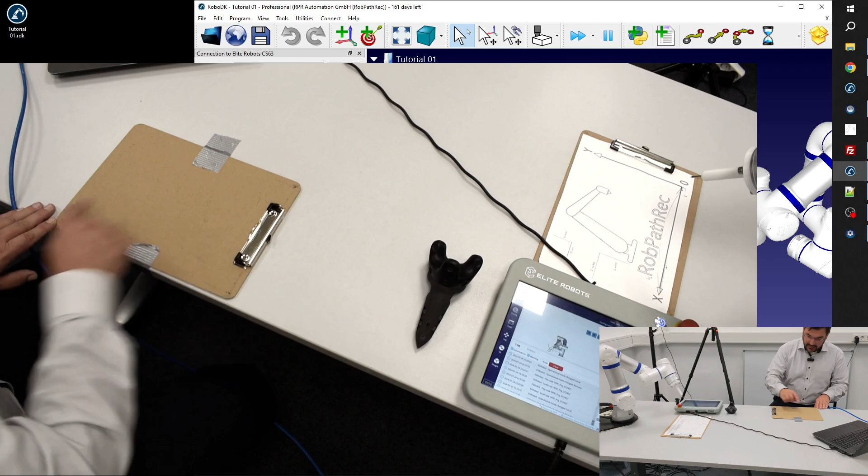So as you can see, I just modified my setup a little bit. I just fixed the same wood plate here in front of me as what we are using here as a frame over there. The crucial point is that I have origin, X and Y, exactly one by one, in the same manner, the same distances, the same position, and the same sequence: origin, X and Y. You can see that this wooden plate is somehow rotated 90 degrees compared to the other one. It's not a problem.

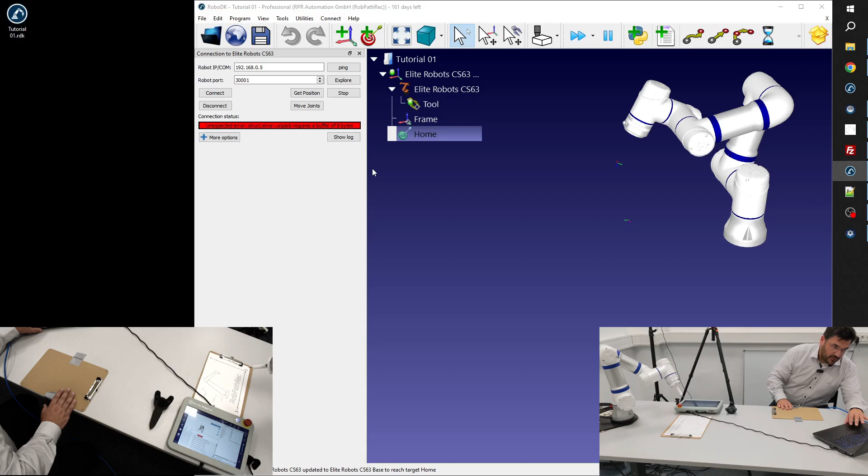We have everything running, and I will start the RobPathRec app, and I will show you that you can make the recording right now, right here, so you can move anywhere. You can go out to a completely different room or a different site, and then you can transfer the program remotely to the robot. And as long as you are doing the programming, the robot still can do some productive work for you. This is the most important, I think.

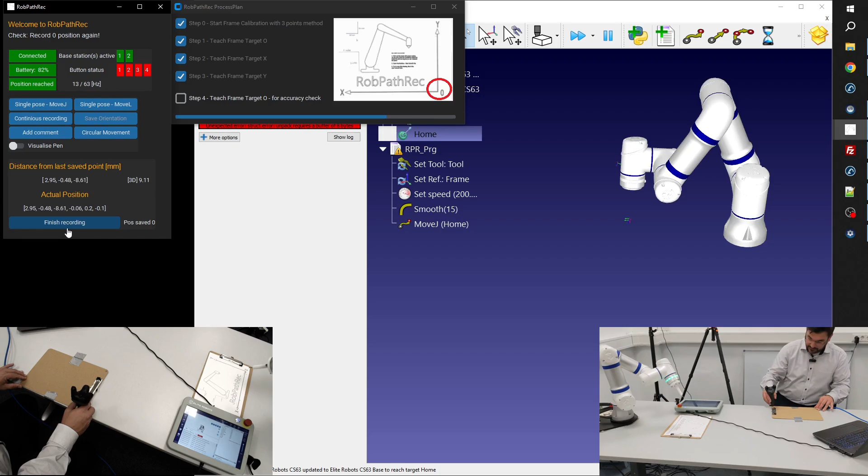So we are just starting with the initial calibration, which will not be very accurate, I guess, because I didn't really take care about the base stations. I just rotated one base station. You can see 1.6 millimeters. This is fair enough.

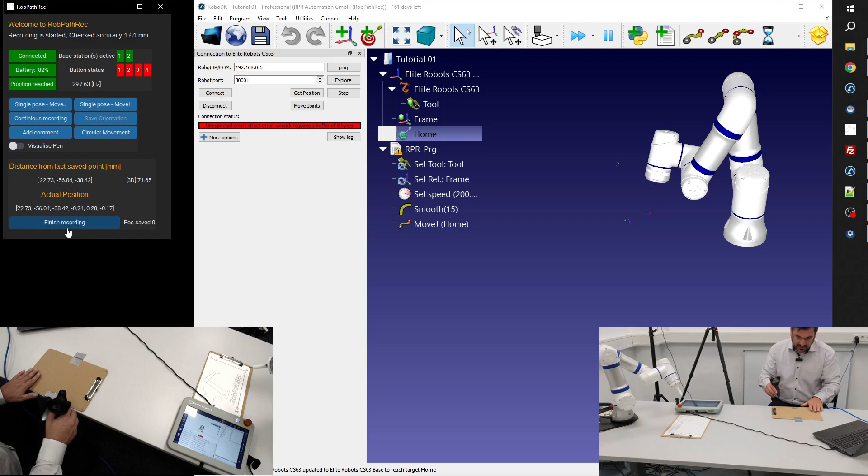And just for your reference, I would like to show you, you do not even have to do the recording here within this area. You can do this next to this area. So you don't have to limit yourself to the area between the points. The points are just necessary for the robot, so that we know where this coordinate system is, where this space is. For your reference, I just switch on the visualization. And I will do the work here now. So this will be my start point.

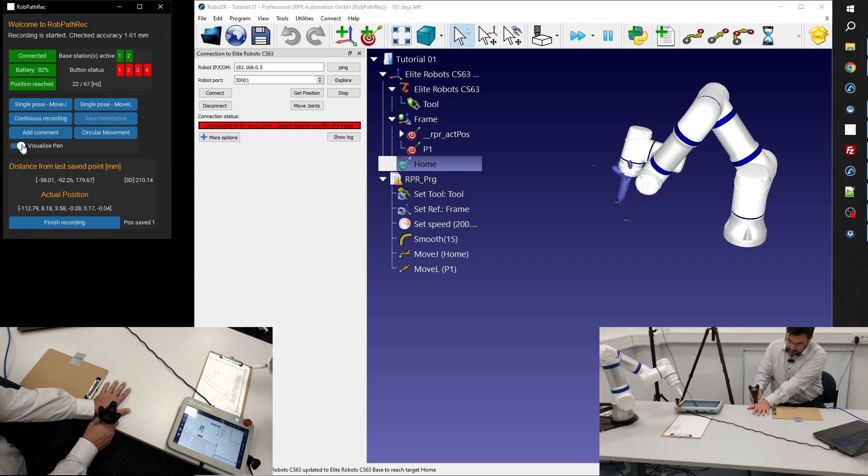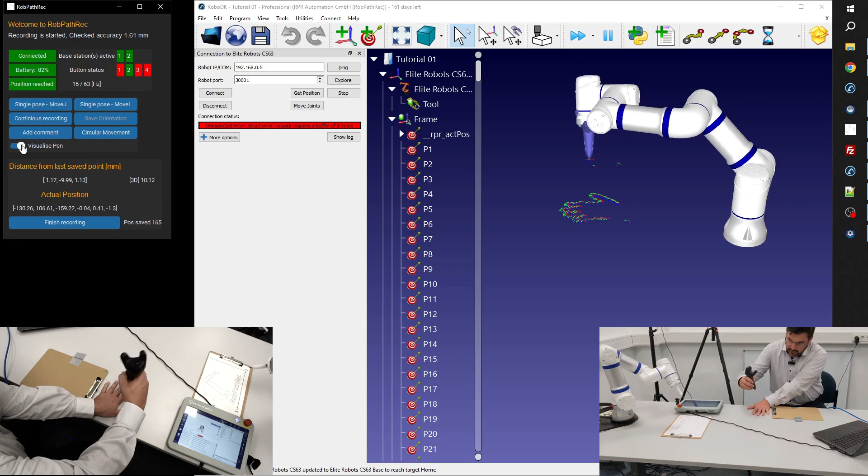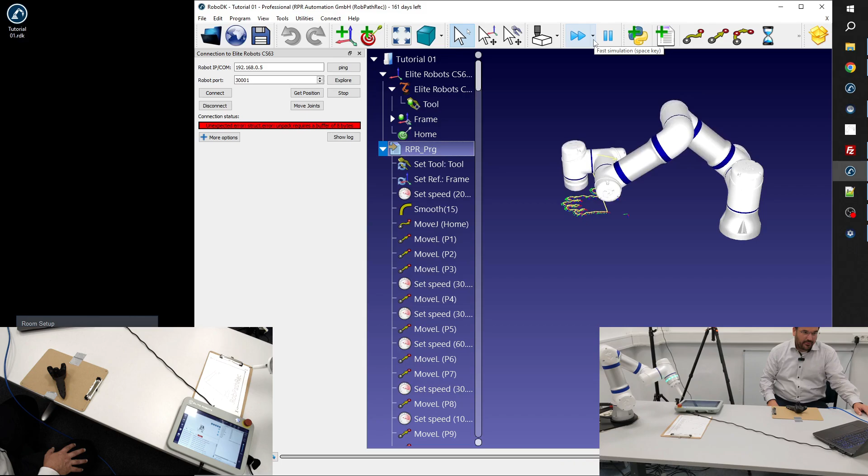Okay, and this will be my finish point. Bam. Okay, that's all. You can see that my hand was recorded over there. I just finished the recording. Great. And first, as usual, we just test out here on the screen: can we reach all of the points? This seems to be the case, even if the movements are not very smooth. For sure, this is a very complicated outline.

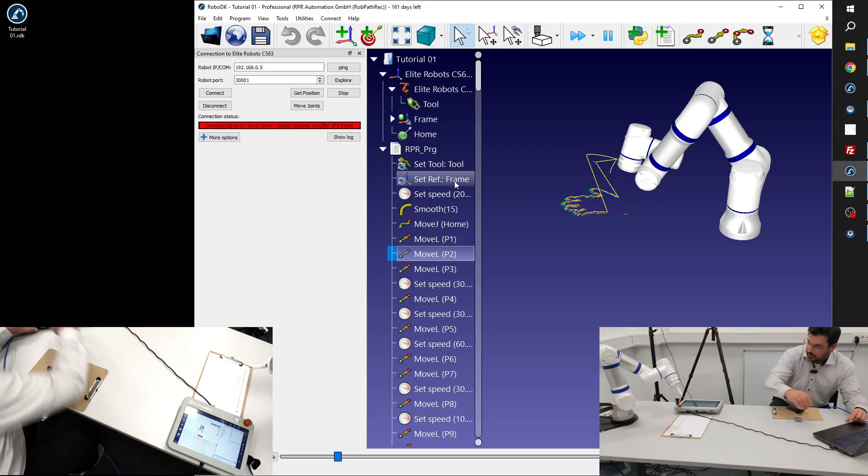Nevertheless, I would show you, this is point 1, and this is point 2. Okay, I would like to test carefully what happens with the robot. I don't want to scratch the desk, so I will just connect the robot again. Just hit disconnect, and I don't know why this error is coming up. Okay. Now it is cleared.

Okay, connect. Correct. So once again, we want to touch point 2, isn't it? Yeah. Here with the frame point 2, okay, same, and then move joint. For a safety reason, I'm just getting my hand on the emergency stop because I don't want to hit the desk, as mentioned.

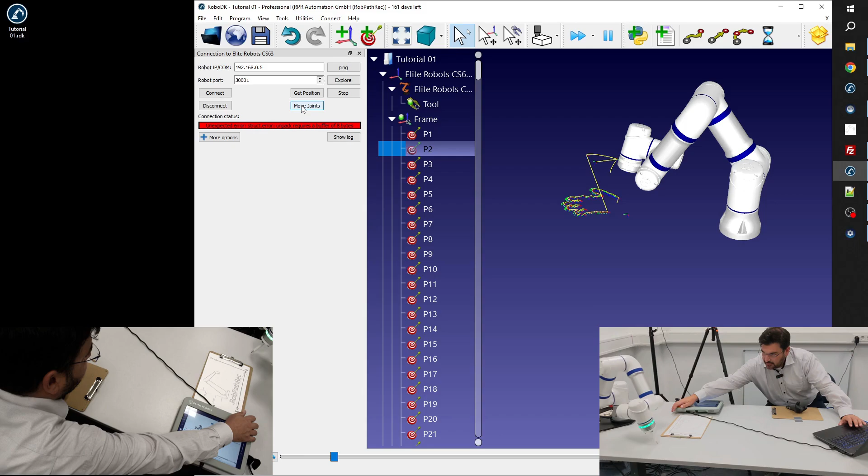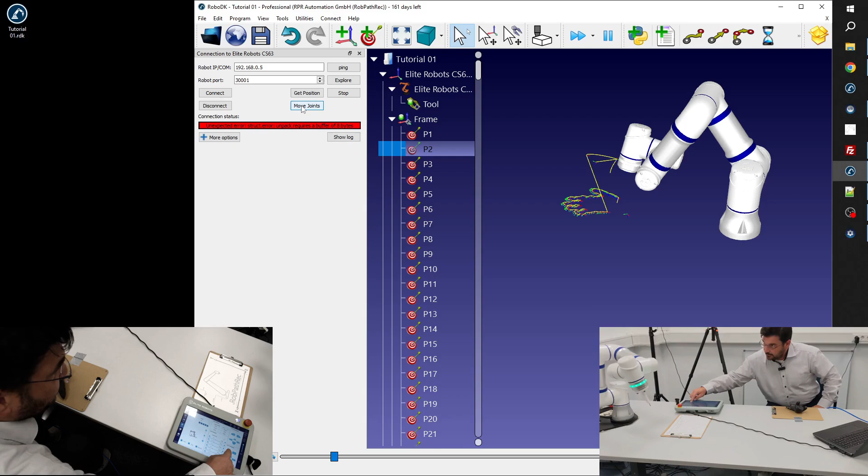Okay, it was hitting the desk, so what I will do right now, I will do an offset because I don't want to make anything wrong. Another way around, I will show you how you can avoid this. So just wait a second. The more intelligent way would have been using a kind of offset from the very beginning, not to damage anything. I would have used the function with the offset. Just show you.

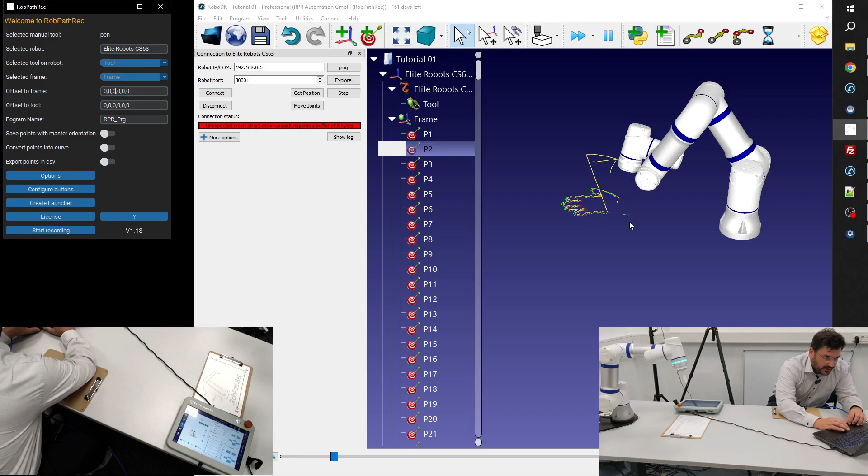And do the recording from the very beginning so that we have an offset. So offset to the frame in the Z direction. We can just check out, okay, the Z on the frame is showing to the bottom. So to come higher with the points, we have to apply a negative Z value. Let me see, -20. Then this should be around 2 centimeters above the desk.

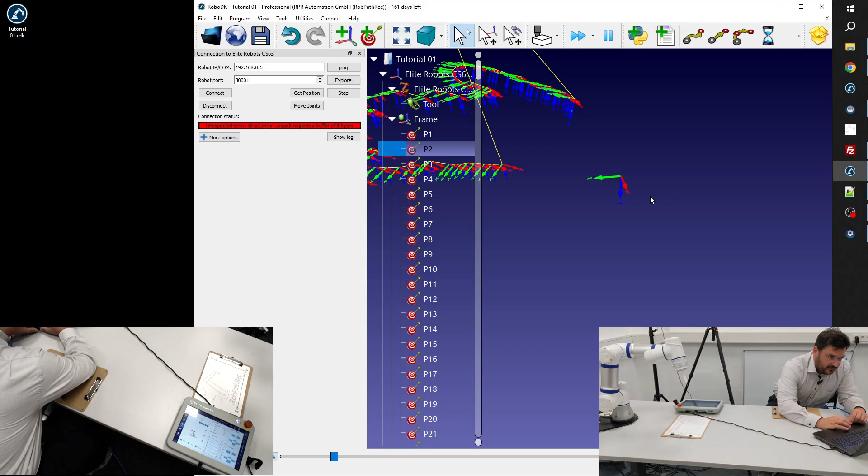Surface of the desk. However, I already have the points here. So what I will do right now, I will just make an offset. I just check out again. Okay, so the tool coordinate system, the Z is showing down. I want to come up, so away from the desk. So this will be a minus offset.

I'm just hitting shift, selecting all of them, and then relative shift. And we will just apply -10 millimeters. So we raised all of the points 10 millimeters higher. And we just test this out if it's the case. We can do this run on robot, and then

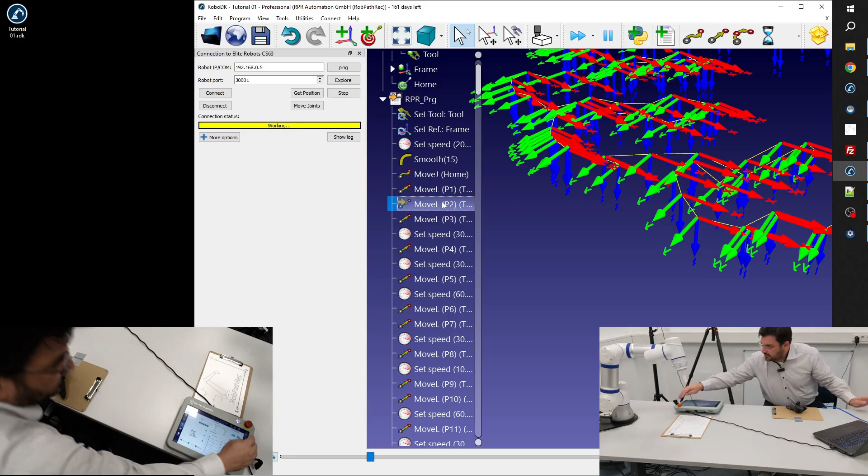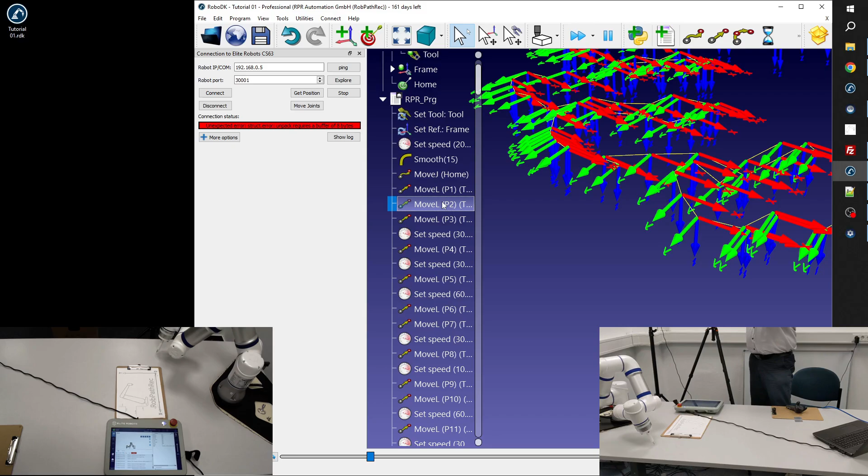okay, so you can see this is approximately 1 centimeter above the robot, above the space of the robot, of the desk. I just align here so that you can see what happens. So I will just come back to the home. And the smooth value, I reduce it to 5. And I just remove this.

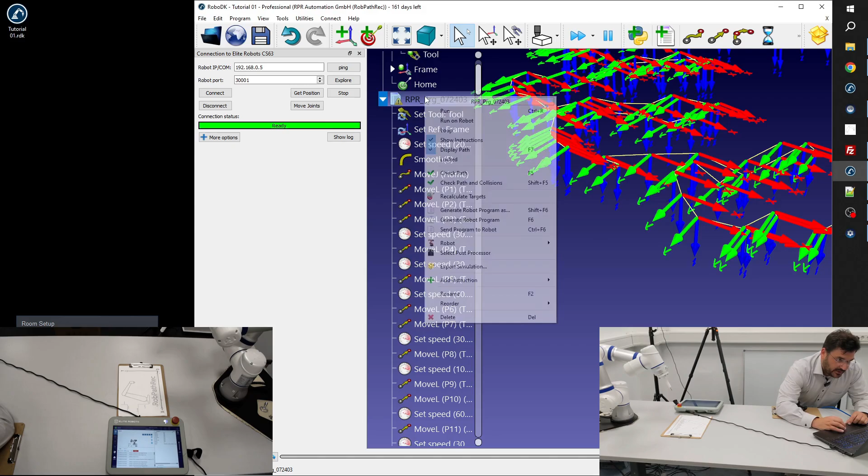Okay, so it seems to be fine. Everything. I just rename it 03 and check the post processor. This is the right one, what I need, and I just generate the robot program. Once the program is generated, which is the case right now, I can just switch to FileZilla.

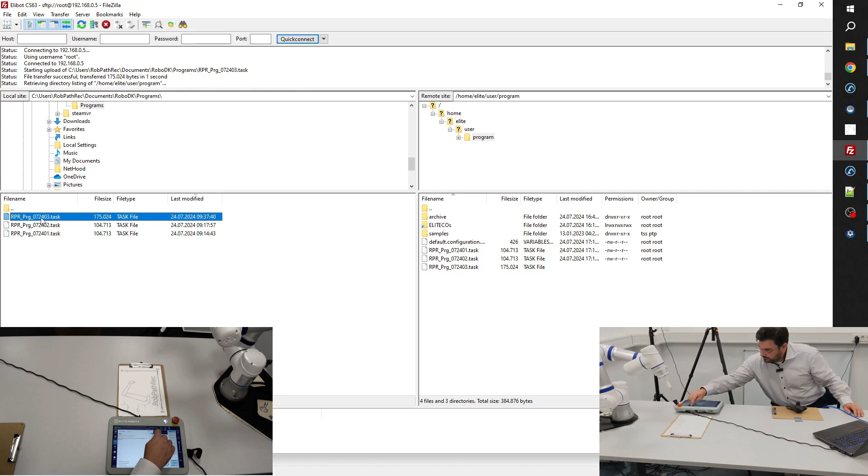Here's the 3. Upload done. I just switch to local mode, task, open, 03, open. Move to the first point via manual control to check that we don't crash anything. Excellent. And then we are ready to go.

And you can see that the robot is copying exactly the movements of the pen. So my hand will be copied over there. I just let it run through. Even the speed values were recorded, which is not necessarily useful in all of the cases. But in this case, it seems to work.

I was struggling here a little bit. I was just coming out from the finger. This is finger 3, I think. What you can see.